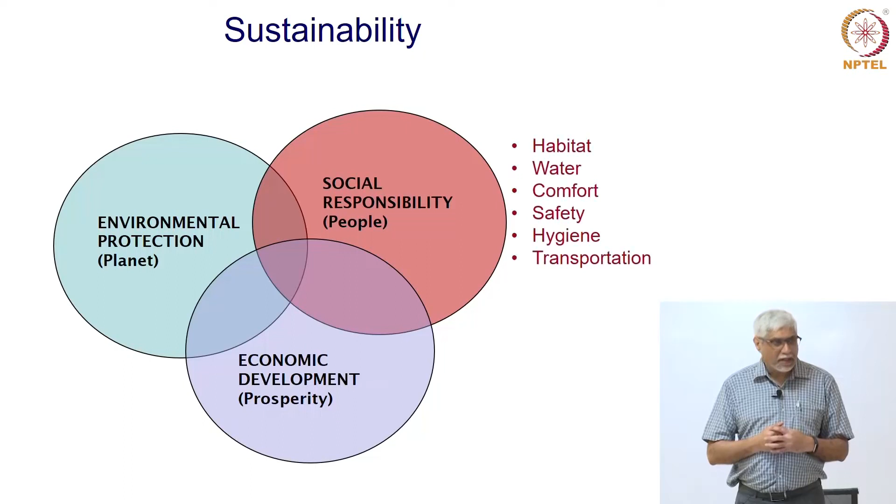We can go into more detail on the part of sustainability which influences people, or the social responsibility - we could look at the different aspects that will benefit or affect people. What comes to mind right away is that people should have a place to live, to work that is comfortable, should have water, food, comfort, hygiene. These are things people require to live properly. Further, we look at transportation - how people can move about without wasting a lot of time, without facing a lot of difficulties. So these could be aspects of social responsibility that engineers, particularly civil engineers, could be concerned about.

About the environment - what is it that we want to protect in the natural environment, in the planet, so that future generations are not affected and other species we share the planet with are not affected? The natural resources are of very grave concern - we cannot use up all that there is on earth to satisfy the needs of the present generation or just the next generation. So we are worried very much about conserving natural resources. We also share this planet with other species, fauna and flora, animals and plants. Many have become extinct because of human intervention, and we want to prevent or at least slow this down as much as possible. So we are worried about the green cover, the vegetation.

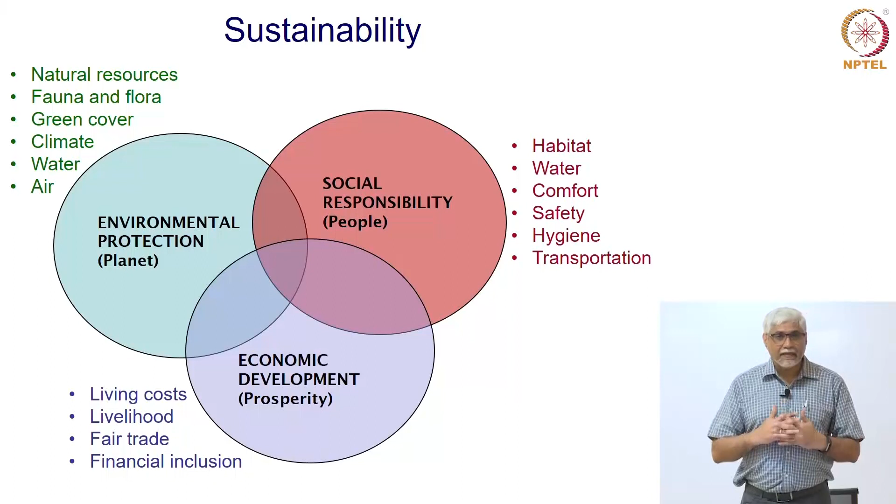To summarize what I think civil engineering does for sustainability: civil engineers and civil engineering provide infrastructure, which is very important for economic and social development, for commerce to happen, for industry to grow, and for people to be happier and more comfortable.

We need civil engineering infrastructure like bridges, transportation systems, water networks, sanitation, and so on. Civil engineering also provides housing, better workplaces, more comfort and safety, as well as infrastructure for public use such as hospitals, water supply networks, and sanitation systems. These are all beneficial to people, to commerce, and to industry.

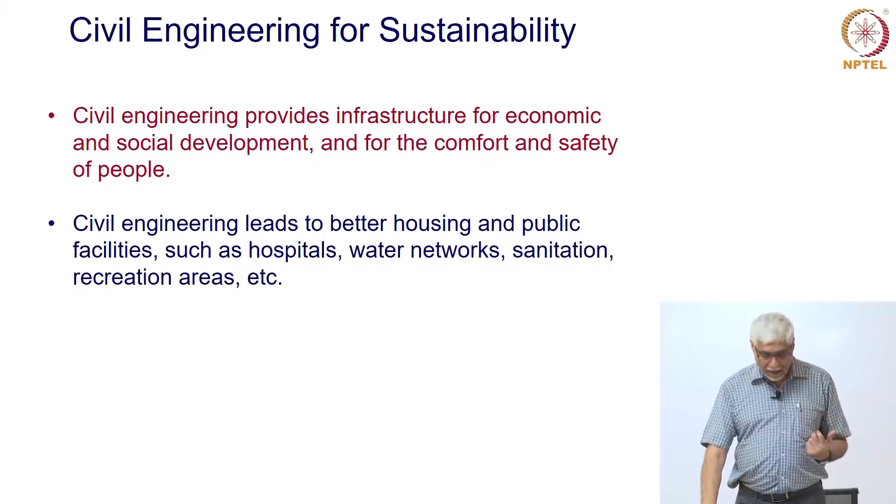Further, civil engineering in most large projects, and probably more and more in every project, plans and tends to protect the environment and natural resources within the planning and execution. We do not want a project that uses up all the resources and creates harm for the environment. So let us look at specific examples of how different disciplines of civil engineering contribute in these different contexts.

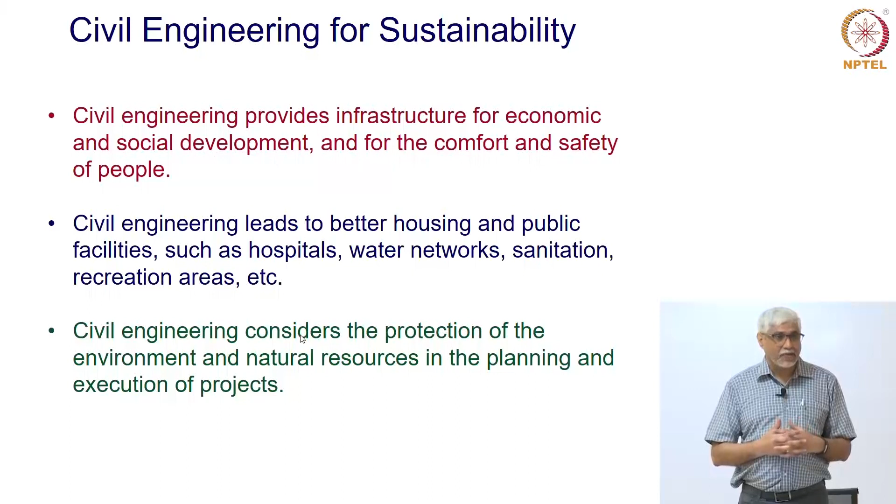The first thing that comes to mind in our country and many parts of the world are railway systems. All of us listening to this lecture have used the railways at some point. They provide connectivity, movement of goods as well as people, and communities are connected — isolation of communities ends. These are very clear benefits of having railways.

This meant a railway was built 740 kilometers from Maharashtra through Karnataka to Goa, with about 179 major bridges and 92 tunnels. It is set in a beautiful landscape, but it was a major engineering challenge.

This meant construction management became very important, and this is where one of the important engineers of our time, Mr. E. Sridharan, became famous — he was in charge of this project and made it successful, then went on to lead the Delhi Metro. So construction management is very important in a project like this, together with transportation engineering, deciding where the railway should be, how it should connect, and what cities should be connected.

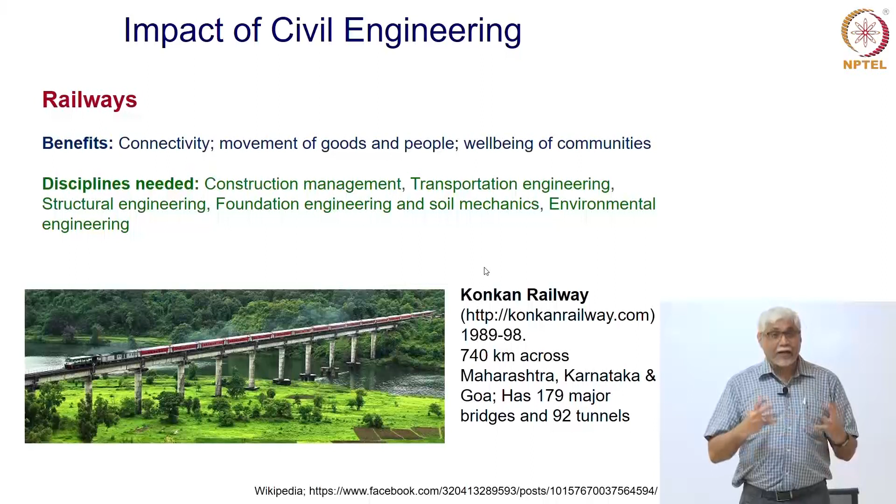Similar to railways, we have airports becoming very important. A community is said to have developed, a city or a town is said to have developed when it has an airport. So it is always a landmark when a city claims that we have an airport. Some cities claim to have more than one airport. So this means that these regions are very developed. It is a sign of development other than connectivity and goods.

So all this soil has to be, will continue to be protected so that it does not slide down. So major geotechnical engineering had to be done to hold this part of the mountain in place so that it does not slide down. So pavement engineering, what kind of pavement will be stable, will not move, will not deform over time? How do we ensure that this slope is stable and does not slide down? How do we reinforce it? How do we design the reinforcement? Geotechnical engineering and soil mechanics again plays an important role.

Construction management - at this remote area, how can we make technologies available for fast construction? And transportation engineering, obviously, to plan the systems, how to control traffic, how to make sure that planes can land safely and take off safely. So this is also an example where again connectivity has been brought in.

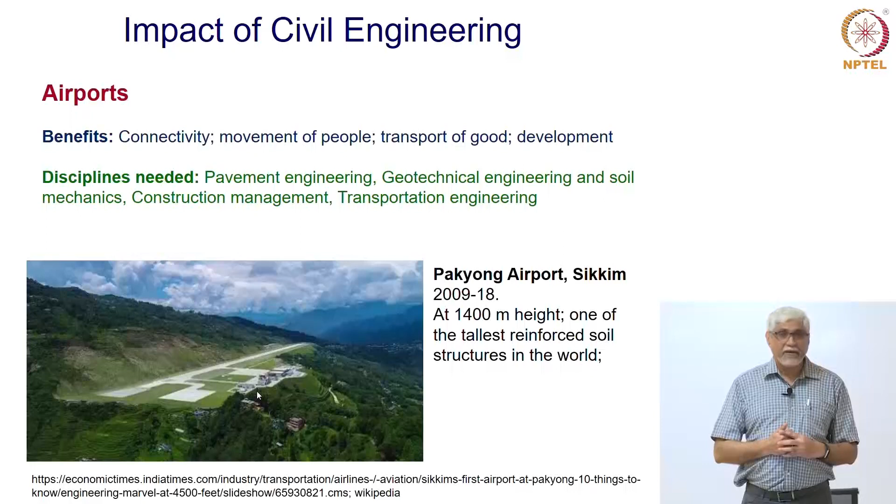Sikkim did not have an airport for a long time and people had to travel by car or bus to reach Sikkim. Now there is an airport, so tourism will improve, trade will improve, commerce will improve and connectivity is better. Within cities also people have to be moved, and we find that in India almost all the major cities have a metro rail project.

And it is also almost guaranteed that the class of today, until you retire, there will be at least one, if not more, metro rail projects happening. Why are these so important? Because we can decrease the traffic congestion, we can have people reach their office from home, go from one place of commerce or entertainment to another quickly without causing so much of a carbon footprint when they have to use their own vehicle. So the welfare of people is very, very important.

People, if they are able to move around efficiently and economically, will promote the society. Pollution is better if you imagine that everybody who is using public transport, instead of their own transport, having a scooter or a car. There is a lot of pollution and the whole carbon footprint decreases. What do we mean by carbon footprint? It is the carbon dioxide emissions coming from burning of fuel, from using machinery, from making machinery and so on. All this will decrease if we have better metro projects, more metro projects.

So again, a lot of these metros utilize tunnels. For example, the Delhi metro started construction in 1998 and is still going on, they are adding more and more.

Right now, it spans about 400 kilometers, 285 stations and 2,700 trips daily, which can take about 5 million people every day through Delhi. So, you can imagine 5 million people are benefited. If they had to travel by themselves without this metro, you can imagine the congestion, the difficulties, the pollution and the carbon footprint. This is reduced when you have an efficient metro system.

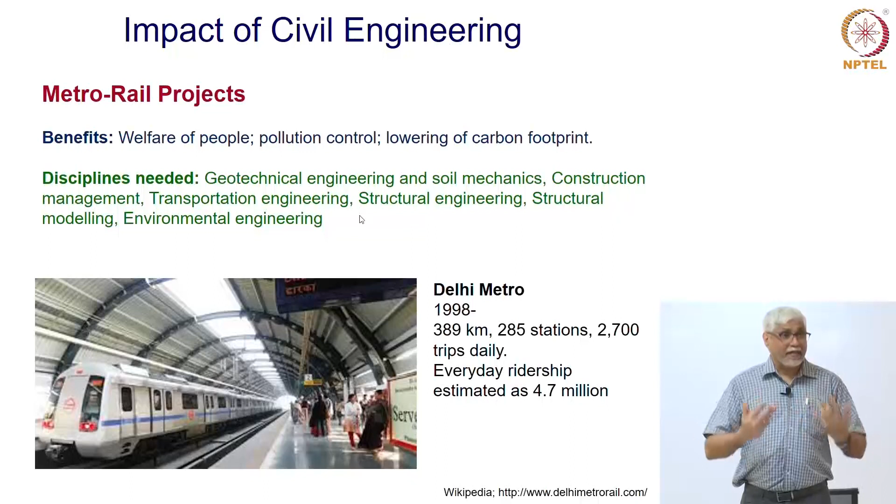We also contaminate, we have also messed up a lot. So, civil engineering also comes in remediation, not only to make new things, but also to correct mistakes of the past. So, contaminated water is available in many, many places. So, remediation or cleaning up is a very important thing.

And the example I have here is from the United States, called the Savannah River Remediation Scheme, where there was a site where nuclear weapons were being made. And this created 140 million liters of very high toxic waste. So, this waste was there, liquid waste, and something had to be done. So, major effort was taken to clean up this water, separate the more toxic from the cleaner water, take this toxic water, mix it with cement to solidify, and put it in these containers of concrete so that this can never escape. So, this was a major project.

In each slide, I give you some references that you can get more information on. Here environment protection was very, very important for health, because if you have this toxic water or waste lying around, eventually it reaches the groundwater, and groundwater is what we eventually will drink. Other things get affected - animals, plants, the environment itself changes and gets affected if we don't clean up. This means environmental engineering has to take a major role, decide how to clean up, and make sure that what we cleaned up is not causing a bigger mess or bigger problems.

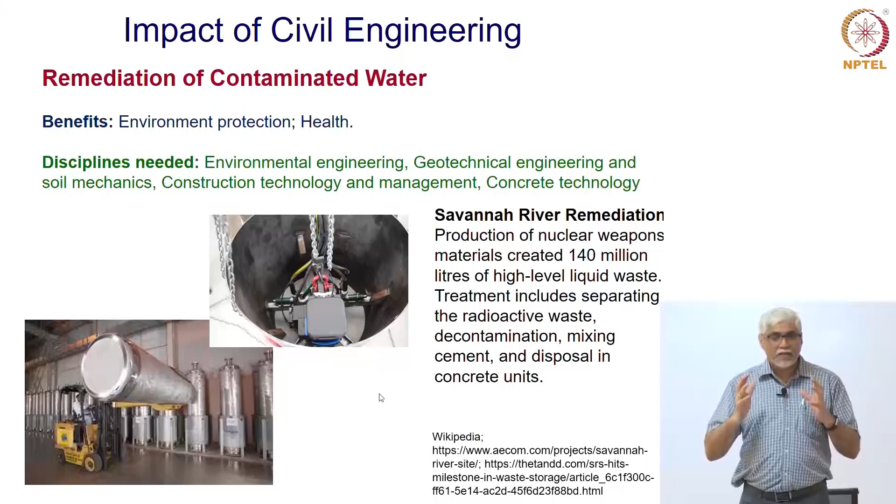We talked about projects. We can also talk about smaller projects, systems of civil engineering or even elements. Bridges, which form part of many of the projects that we've talked about, connect people. We have seen, you might have experienced yourself, that when a bridge is built, new commerce comes up.

Small populations rise around a project at the beginning and end of the bridge, and shops show up. Commerce increases, connectivity is better. Instead of going around the bay, they can cross the bay faster. So carbon footprint decreases, pollution is less.

So again, structural engineering is important, modeling is important, because we want to know that the bridge will be stable for many, many years, that it will not settle down, it will not break, it will not crack. Geotechnical engineering for the foundations, construction management, transportation, environmental engineering, and so on.

The example I have here is currently the longest bridge in India. It is the Dhola–Sadiya bridge, also called the Bhupen Hazarika Setu, built from 2011 to 17. It is about 9+ kilometers long, with 183 spans. Each span is what is between two columns or two piers of the bridge. So it is like 183 small bridges make up this complete bridge of 9 kilometers.

And it is designed to handle loads of up to 60 tons. So you can have a tanker of 60 tons crossing this bridge and it will be safe. So that means we have to understand the mechanics and model it such that it is as elegant as it looks in the picture, but also safe and built to last for a long time. The environment could be aggressive, you would have water all the time and that could attack the concrete, attack the steel. So we have to also protect it from such attack.

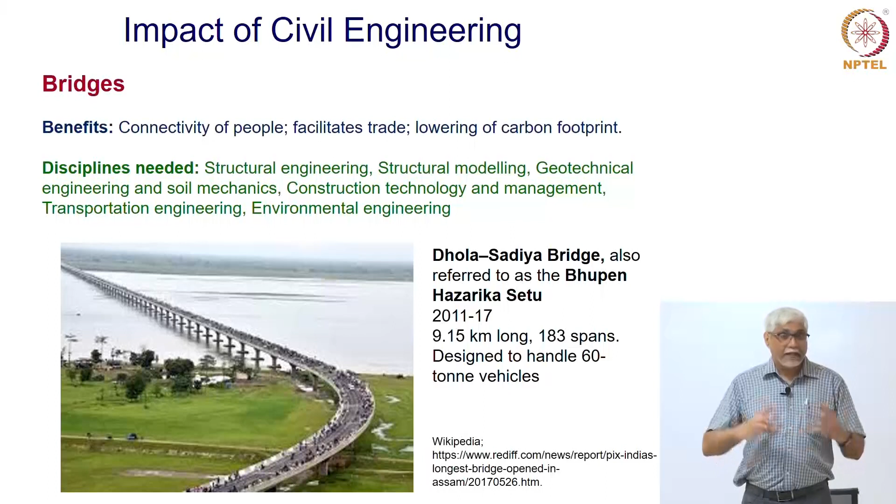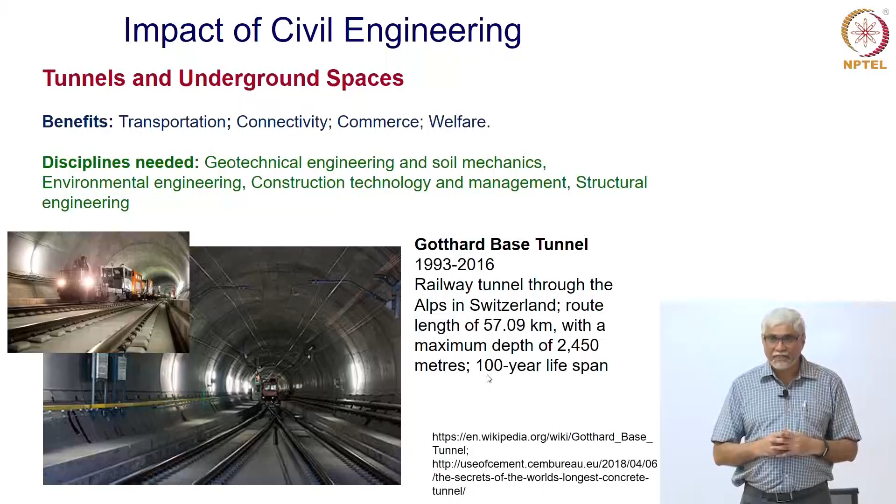Talking about modeling, engineering and planning of traffic. The modeling of traffic in cities, between cities, is becoming more and more complicated. In a country like India, you have all sorts of traffic, what they call multimodal traffic on the road. You have an auto rickshaw, a cycle, a bike, a big bus, a car, and so on. Further, what people are looking at is automated vehicle traffic.

You must be hearing on the news that there are driverless cars, where instead of driving your own car, you are just enjoying the ride or being transported. So, there is a lot of traffic flow modeling happening in all these cases of possible traffic being only of automated vehicles and driverless vehicles. Groups of vehicles, how are they going to travel through the roads and into the cities?

Why would we do it? We want to decrease time delays, decrease congestion, improve health and safety, and facilitate commerce. So, transportation planning and modeling becomes very, very important.

All of you who have been in cities will know the chaos that happens during rush hour, and this can happen in many major cities. Now, imagine that all the vehicles are driven by themselves. In current circumstances, it would be chaos, the cars may never move. So, we have to know how to model the flow and control the flow such that everything will happen well.

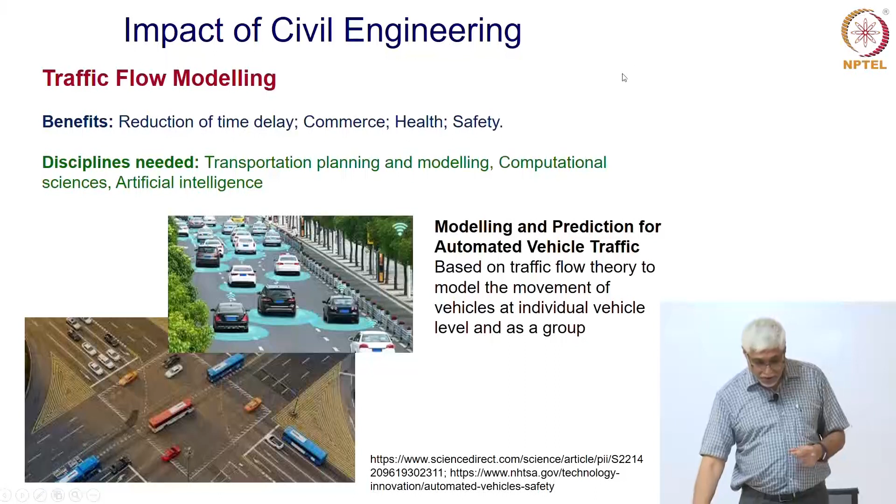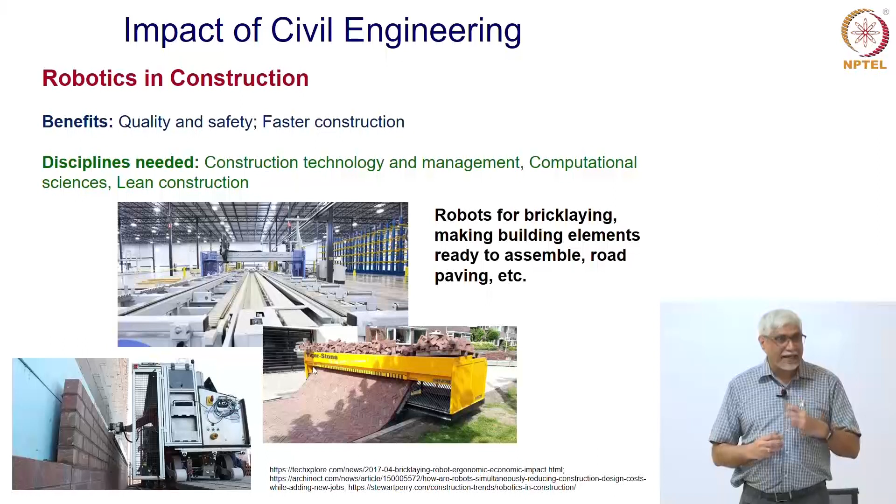Talking about roads again, there is a new technology looking at precast concrete pavements. Instead of the long process of laying asphalt or concrete to make a road, can you make the concrete like Lego bricks in a factory, pile them up, and when needed, bring these panels, put them together, and have traffic crossing in a few hours? This could be used for new pavements and for pavement repair.

What do we get? Quality and safety. Instead of potholes, can we have a new road fast? Can we have a road repaired fast enough? It will be more economical in the long run. This means we have to understand how the concrete will behave, how the technology will be, can we bring in robotics, can we bring in automation, and make sure all the pieces stay together for a long time. Again, lean construction, no wastage, faster and more economical. This is some new technology which is coming in.

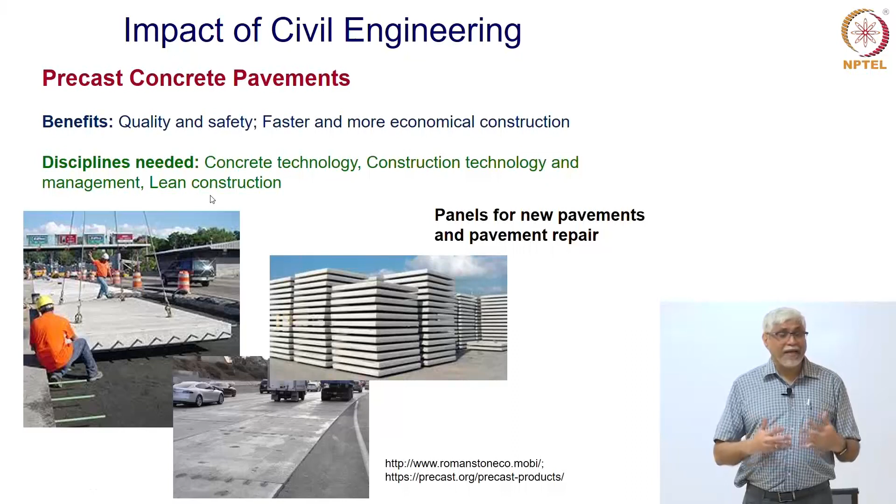Talking about concrete, can we make concrete more specific to what we want? Concrete traditionally, as discussed in this course, was a mixture of cement, water and stone pieces, what we call aggregates. But now new chemicals are being put in to move away from a site like this with a lot of people and a lot of energy. You would have seen in every construction site so many people, some pouring the concrete, some leveling it, somebody vibrating it and leveling again, supervising and so on.

Can we go for a concrete that just pours itself? Can we even avoid a concrete which needs reinforcement? Can the concrete come along with the reinforcement, so it will not require anybody to pour it? So, I will show you a video.

This is from one of the works that we have done here, where we have a self-compacting concrete that does not need much help being poured, vibrated and compacted. It sort of pours itself. Further, it brings its own reinforcement, which is mixed into the concrete itself, so you do not have to put these bars all the time and make sure they are in place.

This is a concrete which is mixed such that it can flow over a long distance. You do not have to have lots of people, just some people to level it off and check everything, not too many around. The benefits: quality, safety, faster construction, better working environment. You do not have to have so many laborers all the time working hard, just somebody leveling things off. This means we have to understand concrete technology, construction technology, and this leads to concepts of less wastage or leaner construction.

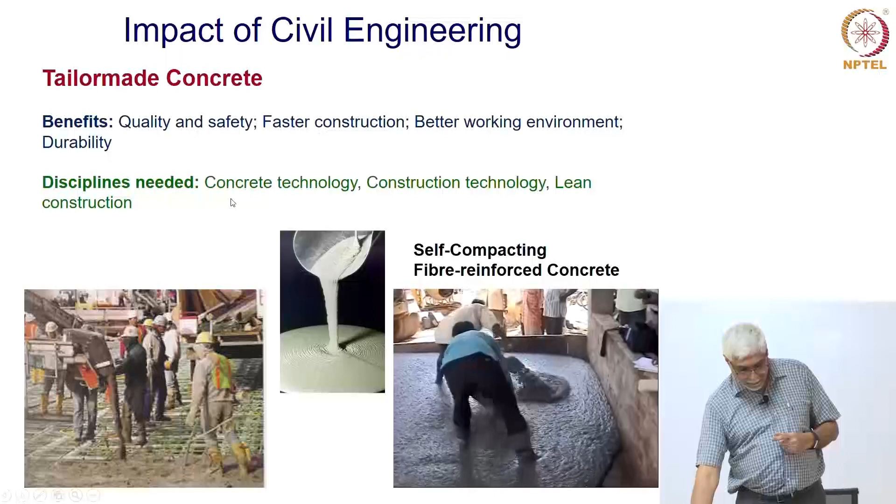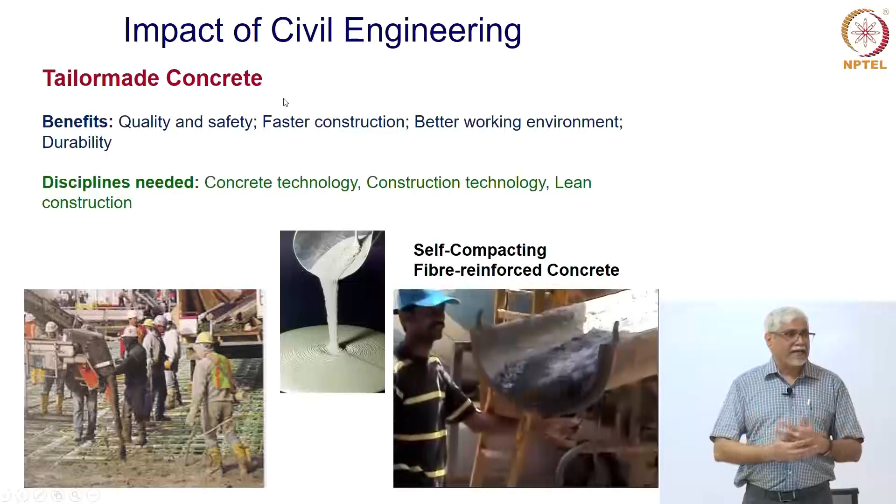We talked about remediation in terms of water. What do we do with all the waste from construction? We have buildings built over a long period of time, and when we want new buildings, we demolish these. When bridges are old, we have to demolish them. Where does all this waste go? If you have experienced it, they go into landfills, legal and sometimes illegal, where people just dump whatever they have from construction or old construction. This is piling up and creating a mess, filling up a lot of empty space.

So, there is a lot of research and energy being put into recycling this concrete. Old concrete is being used to make new concrete. There are systems used to crush the concrete up, sometimes even at the same site. Suppose you have an old road, there are machines which will chew up and remove the old concrete, at the same time make it into new concrete and put it back. You can have cases where it's accumulated from demolition sites, or cases where at the same site you use the old concrete, break it up, and mix it back to make new concrete.

Obviously, this leads to conservation of resources and waste reduction. We cannot keep excavating mountains to make new buildings, bridges, or roads. So the pressure is on construction experts to come up with ways of recycling concrete and other construction materials to make new materials and new uses. We have to understand the chemistry well, know what equipment to use, and manage resources so that it remains economic. And then there's the environment - will there be a lot of dust or contamination if we do this? These are questions which have to be answered.

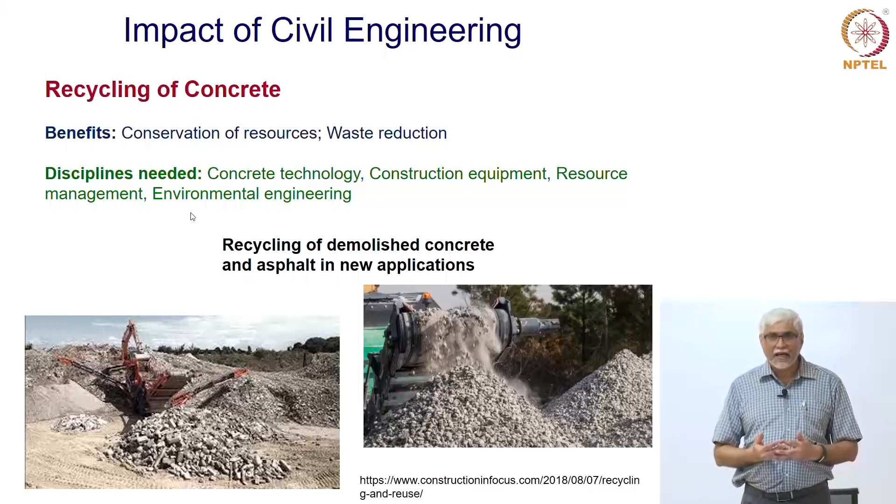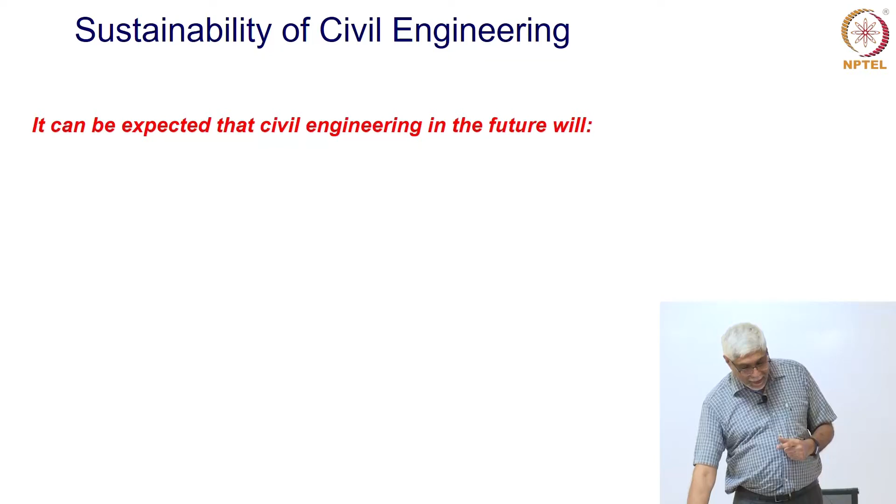So, to summarize, we have looked at how civil engineering can promote sustainability. I have also tried to answer whether civil engineering will be in vogue in the future, or whether it will be sustainable for long enough. If we have to do this, the future of civil engineering has to be different, has to incorporate new things - it cannot be business as usual. So we can expect that civil engineering in the future will have certain characteristics.

First of all, it should become more location specific, it should be tailor made. One solution does not work for the whole world - even within the same country it will not be the same technology. We will have to understand enough that just copying a technology will not work; we will have to bring up new technologies, adapt technologies. So civil engineering in the future will be more location specific, tailor made - just like the word tailor. When you want clothes, you choose what you want. All of us do not wear the same clothes, may not fit into the same clothes. So technology also has to be like that - we have to see what fits us. We cannot use something developed elsewhere blindly without adapting.

We should continue to be more protective about the environment - many aspects, using resources, using water, contamination, destroying our natural resources. This will happen less and less, and this is what we are seeing as well.

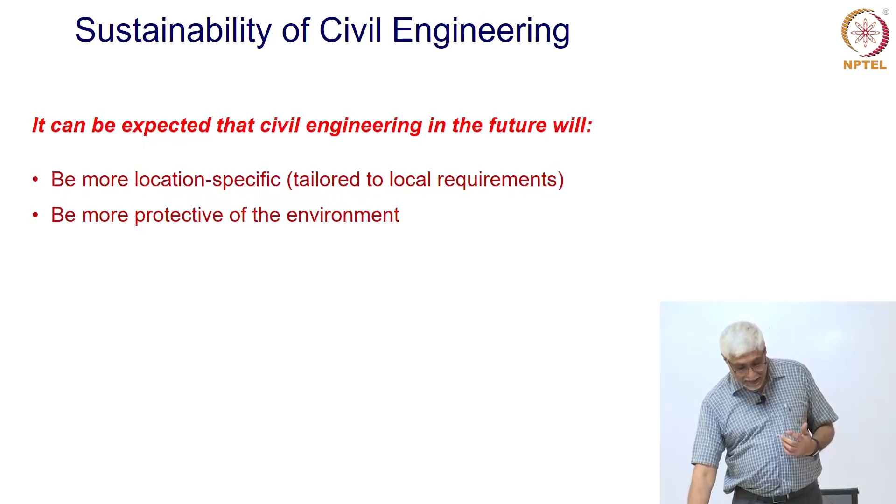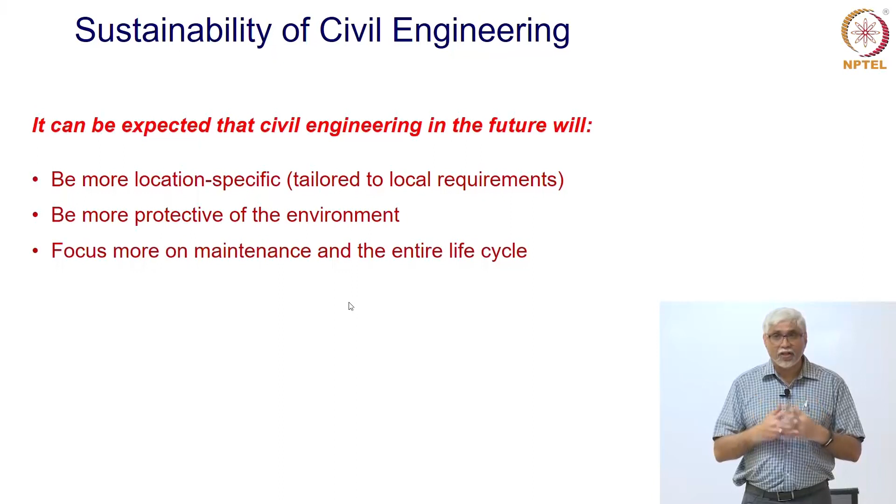We will focus more on maintenance and the entire life, not just the initial part of the project. Traditionally we have been very concerned about making the project happen, but not much about how it will be maintained - is it more maintainable, how long will the life of a structure be? Traditionally this has not been our concern as civil engineers, but this will change. It will be more about maintainability, more about life cycle. This is one more change that I believe will happen.

Instead of using all new materials, we will use more older material and recycle more and more, just like plastics are being recycled. We can have more construction done with old construction material. We could even make it compulsory that when you demolish something, you should use all that material back in the new construction.

We will involve more automation, less manual labor. Labor has always been a fundamental part of construction - we have used unskilled laborers, lots of laborers for construction. This means there are people who are always working very hard, not getting paid a lot, and having limitations in what they can earn and have as a livelihood. So this will keep changing. We are seeing, as I mentioned, robotics and so on - there will be more and more automation.

We will also have construction that is smarter, buildings that are smarter. We will have sensors built in, just like we talked about automated cars. There could be buildings which incorporate sensors, telling us how we have to adapt if something is not comfortable - how can we change? Before collapsing, can it warn us that something is wrong in the structure so that we can control it?

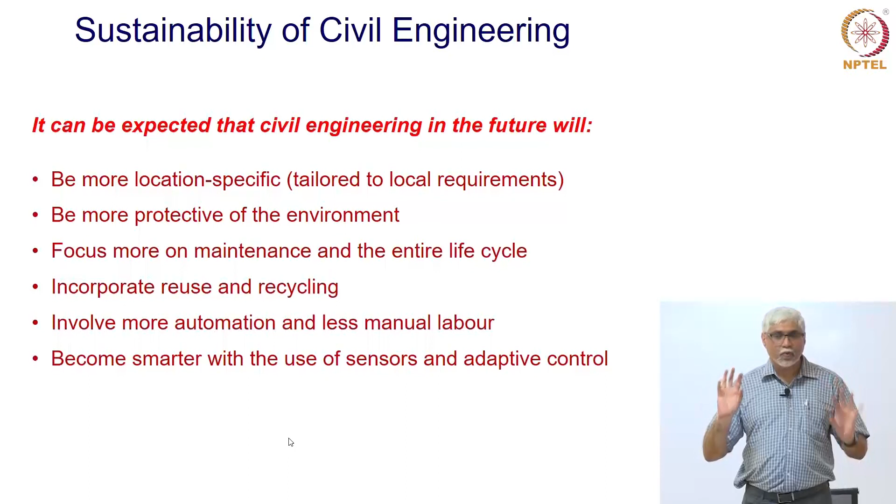So these are different aspects that I believe will ensure civil engineering is sustainable and will go on for a long time. If I had to predict changes in civil engineering, these are things that will possibly happen to make it continue to be relevant and useful for society. So with that I finish - the idea was to focus on two aspects: how civil engineering helps in sustainability, and how it will change, evolve, and adapt to continue to be relevant to our society.